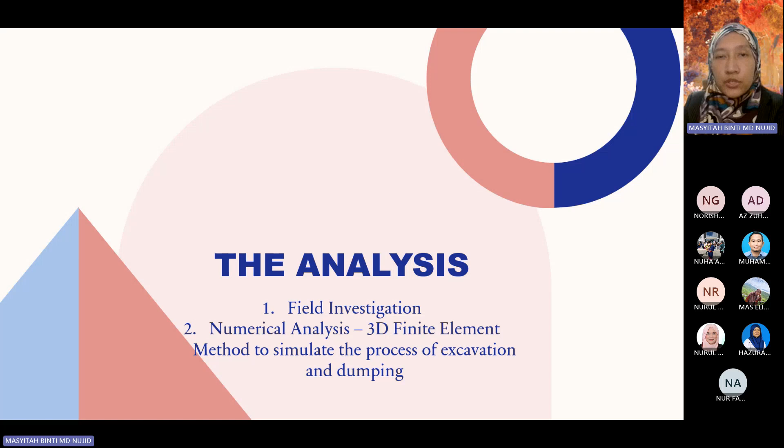We have building number 7, having some sort of pile below the structure. At the north side is the dump site area. Meanwhile, at the south side is the excavation for an underground car park.

So looking back at the south side, they provided soil nailing to retain the soil from movement, but never realized that the problem started where the dump site occurred, where the first stage had an embankment height of around 4 meters, and then at the second stage the total embankment height was 10 meters. So the increase of the embankment over time caused the lateral movement that resulted in the building's collapse.

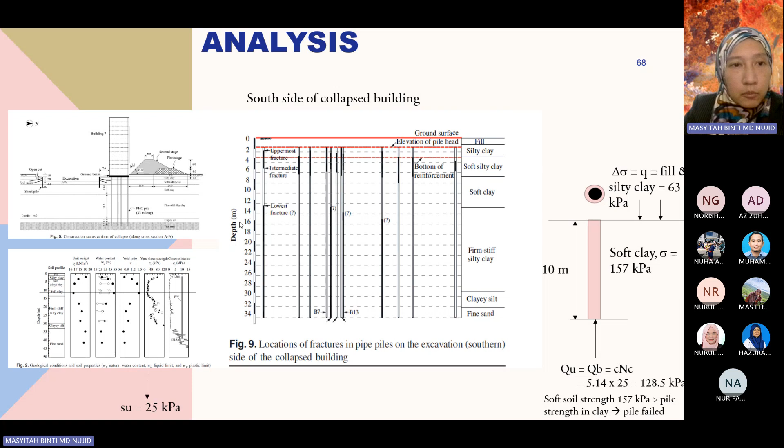To understand what occurred over time, they made cross sections of the building and the area. You can see the 13-story building, the excavation at the south side, and the dumped soil at the north side.

The simulation is three-dimensional, with geometry length, width and height of the soil profile around 160 by 170 by 50 meters. These colors indicate the soil profile at particular depths, meaning the soil has multiple layers with different soil properties, and this high-rise structure is built on soft soil, so you can see the variance of the undrained shear strength. The layout of the problem is given in figure 10b.

What's important in the finite element method is the mesh size of the elements. Every node of the elements gives you stress and strain. Every point of the finite element nodes tells you the different values of stress and strain at that particular point, resulting in the strain and the deformations.

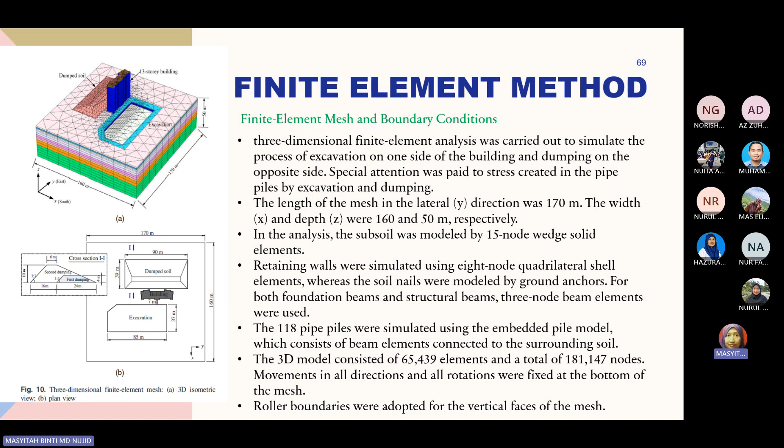So same thing here, dia punya implementation dekat software pun sama, you kena identify lah, you nak allow for deformation, movement at what directions, kemudian you nak kenakan boundary apa, is it roller or is it pin or is it fixed end. So kalau fixed end maknanya takkan ada deformations lah, laterally ke vertically ke apa kan. So kalau you assign for roller, so apa yang kita akan dapat lah. So all this based on the assumptions and based on problem yang kita ada.

So untuk case yang soil parameters ni, so dia dah list out few parameters involved. So from the beginning, from the top sehinggalah ke beberapa kedalaman iaitu 50 meter ni. So you can see that tanah ni is very soft soil. In part of the strength is a very low shear strength. So bila dia low shear strength, maknanya we need to do something lah, sama ada soil improvement ke ataupun soil reinforcement. So at the south side ni, kalau you nampak sebelum dia nak buat underground excavation, so dia dah letak retaining wall as a soil reinforcement menggunakan soil nailing.

So dalam this case, after identifying the depth for every particular soil types, and then they also need to know the unit weight of the soil. So you can see the unit weight of the soil not constant from the first meter at the ground surface to the end, around 50 meter. Same to the undrained shear strength, the effective cohesions, the friction angle. This is EU, the undrained elastic modulus, E' effective elastic modulus, Fs is the ultimate skin friction, Fp is the ultimate end bearing. So these are the parameters for soil.

Maknanya kalau talking about shear strength parameters, selalunya kita nak tahu what is the effective C, what is the undrained shear strength, and also what is the effective internal friction angle. And then the EU, E prime ni dia lebih kepada elastic modulus, because as I said earlier, bila you kenakan loads pada structure, dia akan hasilkan stress. So bila ada stress, dia menghasilkan strain. So the deformations rely on two behaviors, elastic dan juga plastic behavior. So the elastic behavior controlled by these two parameters, yang modulus dan juga Poisson ratio. Meanwhile, for the plastic behavior is controlled by three parameters, iaitu dilatancy angle, effective cohesion dan juga effective friction angle. Assuming that the soil fulfills the Mohr-Coulomb failure criterion.

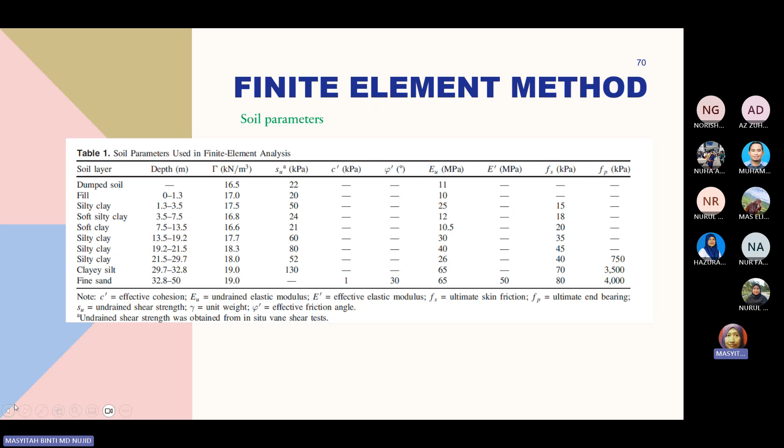And Fs, Fp adalah kalau kita tengok balik theoretical from the pile bearing capacity, Q ultimate sama dengan QB plus dengan QS. So QB is the end bearing capacity, QS is the skin friction capacity. So Fs, Fp tu dia punya coefficients to calculate the ultimate skin friction dan juga ultimate end bearing capacity. Okay, apa pentingnya parameters ni untuk kita masukkan dalam modeling kita lah.

So dalam part of the construction sequence, so these are the assumptions by these researchers, yang mana firstly they're going to assume that the initial stress conditions were generated firstly, and then the construction starting by having foundations, piles installations, and the building. Kemudian the next construction sequence is a dumping of soil to a height of 4 meter on the northern side of the building. And lastly is the constructions of the retaining wall, excavations and dumping of soil to the final height of 10 meter. So ini adalah second stage.

So there is a difference in results kalau the constructions activity ni wrongly set. For example, kalau you tengok at the north side of the building ni, dia punya dump site ni ataupun dump soil ni dia ada dua. Satu yang 4 meter, kemudian satu lagi yang kali kedua dia dump, total height is 10 meter. Let's say lah kalau kata kita buang nombor 3, kita assume construction sequence ni dia terus letak sebagai 10 meter ataupun dia split 10 meter by assigning 5 meter, 5 meter. Itu pun dia boleh bagi difference result to the total deformations of the analysis.

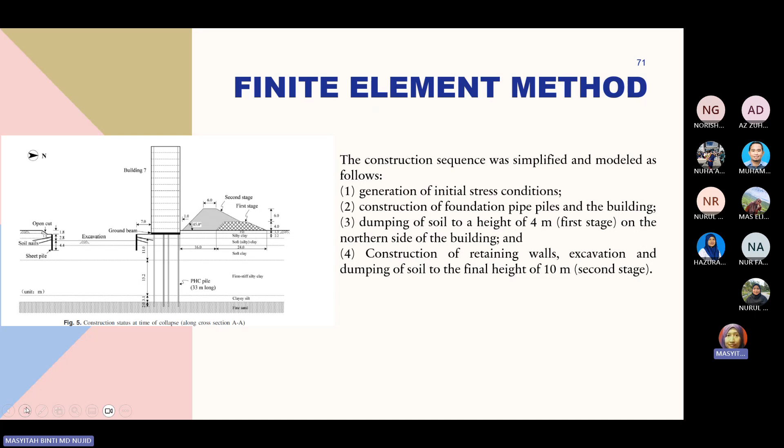It shows that after soil had been dumped to a height of 4 meters on the northern side of the building, the maximum bending moment of the pile reached approximately 58 kilonewton meter. This is the positive moment, and the value is within the pure bending capacity of the pile, suggesting that the pile had likely remained intact at that point in time. This is consistent with the fact that the building was not damaged in the first 6 months after the soil dumping, so this is true.

The maximum positive bending moment in the pile developed approximately 10 meters below the ground surface. So this is what it said then. Below 10 meters depth, there was found to be a negative moment which heads toward the excavation.

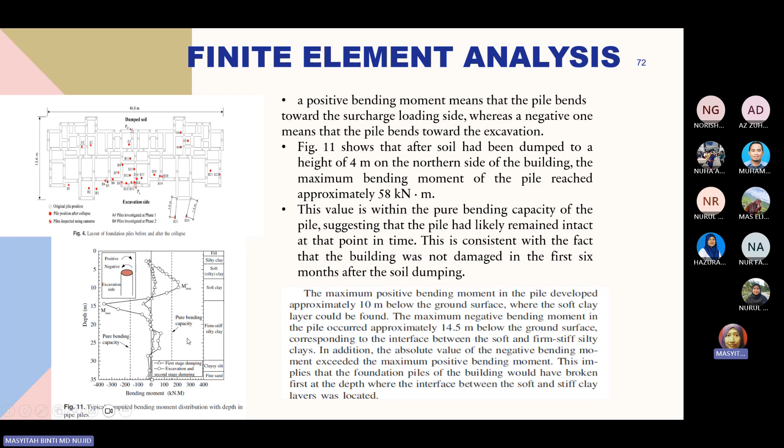So actually it's giving you the idea from the simulations, it seems there was already some signal for structural failure to occur. Then they plot again the pure bending capacity of the pile along the excavation and also the pile near the dump site, one representing the north and the other the south side. It says that the bending capacity of the piles on the excavation side of the building was exceeded, and this pile failed before those on the soil dumping site did.

The embedded pile model, which consists of elastic beam elements, was adopted, and the breakage of the pile could not be simulated in the analysis. This is the reason why the bending moment kept increasing after the bending capacity was exceeded. So this is one of the weaknesses we can find from simulations, because they can give you results until the end. This really needs some expert or engineer very familiar with doing simulations, who knows when to cut off the readings. This is what was stated by the researchers.

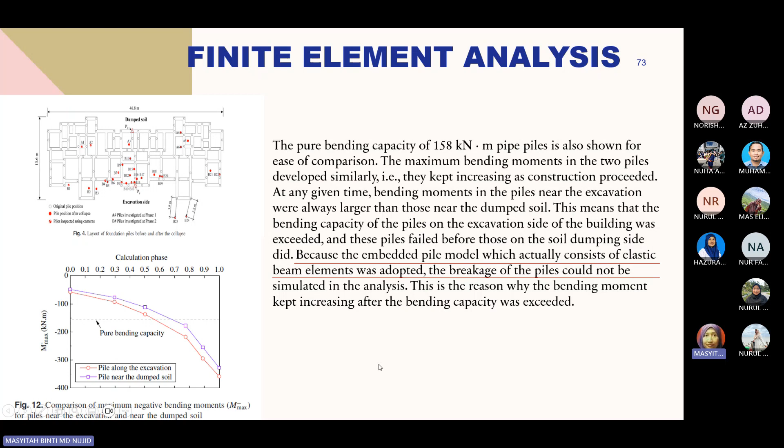So what can we conclude from the post-failure analysis is that at the north side of the collapsed building, uppermost fractures could be seen near the interface between the reinforced and unreinforced section, located approximately 1 to 2 meters below the original level of the pile head. Most of these failure surfaces were flat, implying that these piles failed under tension.

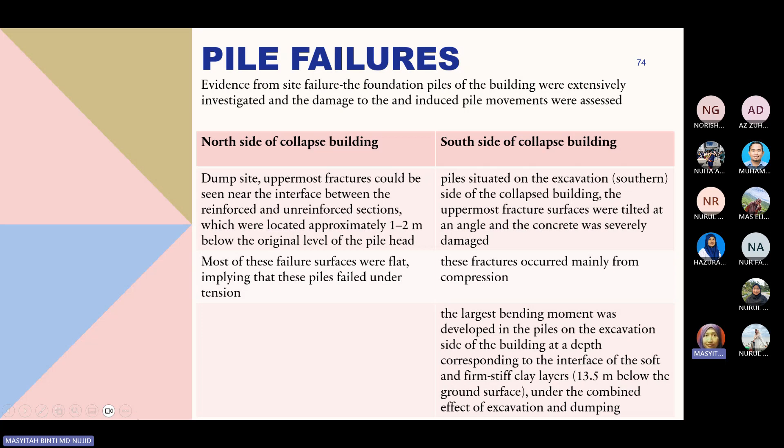Meanwhile, at the south side of the collapsed building, the pile situated under the excavation side, the uppermost fracture surfaces were tilted at an angle and the concrete was severely damaged. These fractures occurred mainly from compression, and the largest bending moment was developed in the piles on the excavation side of the building at a depth corresponding to the interface of the soft and firm stiff clay layers, under the combined effect of excavation and dumping. These conclusions were based on the results found from the simulation analysis. The schematic images show exactly what happened at the site for building number 7, a 13-story building.

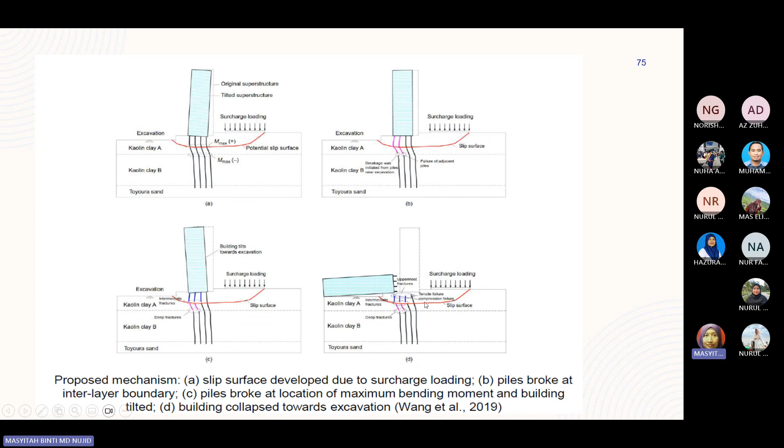Okay, what are the lessons learned? The geotechnical engineers and contractors should be better trained to improve their understanding of the effect of surcharge loading on PHC piles, and the proper construction procedures and site supervision schemes should be explicitly spelled out. Engineers who design foundations in soft soil regions should consider not only the final loading conditions, but also any temporary and transient loading conditions during the construction process.

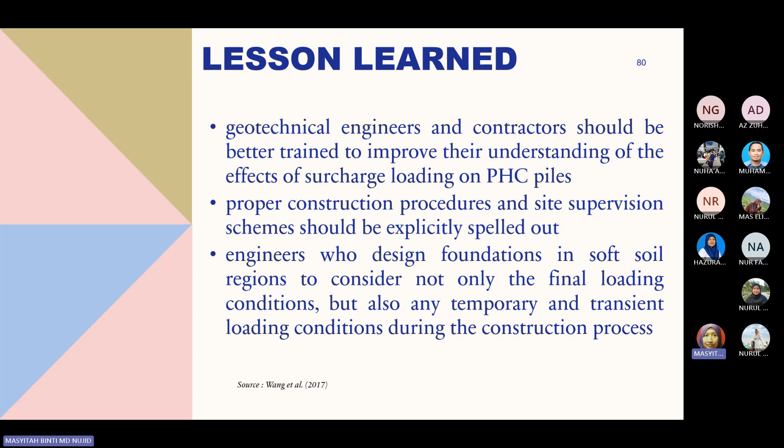So simulations can give extra input or additional factors which we cannot get from analytical calculation alone. We can add on, for example, the other effects or factors to the soil structure problems or interactions.

In summary, it is evident that for this case history, the effect of the temporary embankment filling adjacent to the building may not have been properly taken into account in the foundation design or in the construction.

So the simple but important lesson is that in order to successfully design a foundation in soft soil areas, engineers not only need to consider the final loading conditions, but also any temporary loading such as those that might arise from storage of construction materials and construction generated waste soil.

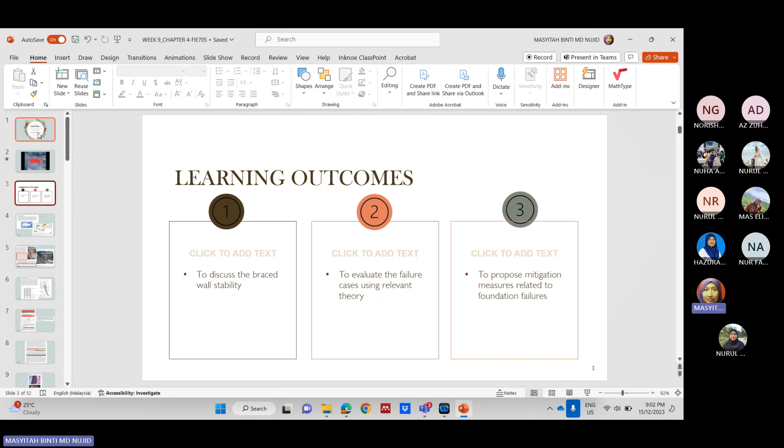Okay, for the learning outcomes, so if you notice here, this is will be on Chapter 4, Braced Excavation Collapse, Nicoll Highway Singapore. Our learning outcomes are to discuss the braced wall stability, to evaluate the failure cases using relevant theory, and to propose mitigation measures related to foundation failures.

So these are the very common framework kalau you ada case study ataupun post-failure analysis. So the first case, we begin with the case descriptions sebelum kita boleh bedah siasat lebih dalam dari segi dia punya analisis dia, kemudian mitigations dia, dan juga apa yang kita boleh ambil pengajaran daripada case study.

So the island city-state of Singapore has one of the best public transport in the world. So yang ni memang dah diakui lah. So the Mass Rapid Transit railway network is the main backbone of this system. The constructions of new 33.6 km long underground Circle MRT line, CCL, started in 2001, costing approximately 6.7 billion. So the CCL will link all the radial lines leading to the city.

So after 3 years lah, maknanya lepas projek tu dah initiated, so dia failed lepas 3 tahun lah. The first stage of this construction, CCL1, was 5.4 km long and was subdivided into 2 contracts, C824 and C825. So saya rasa ada yang di antara kita memang quite familiar with the projects - tender, macam mana dia nak assign, and berapa total cost project.

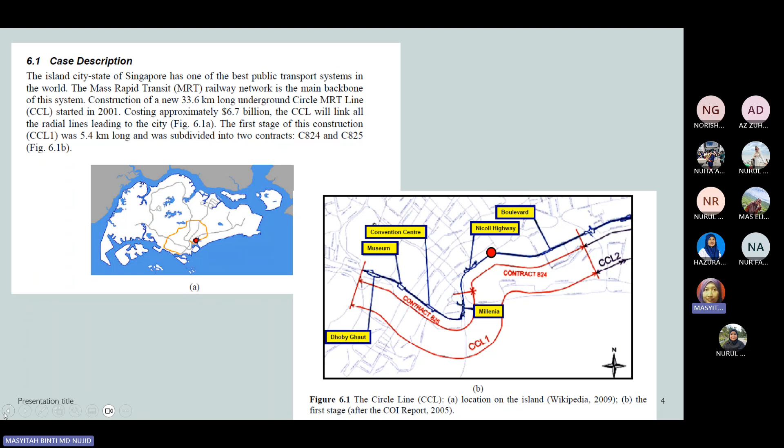So CCL1 tadi yang ni lah, CCL1 dia punya jajaran daripada from the right to the left side here, Boulevard started until to the end of the convention center ataupun Dhoby Ghaut. So bila I say lah, bila this failure occurred, dia memberi impact to the social, dan kesannya is back to nak back ke normal, dia ada benda-benda lah terkesan kan.

So the Singapore government appointed a Committee of Inquiry, COI, to ascertain the causes and circumstances of the accident. From the report in 2005 submitted to the government and the public on the internet, the main source of information for this chapter were found. It concluded that the computer-dominated age, sound like a paradox, which a wrong use of numerical modeling in geotechnical design, together with some structural errors, were the main causes of the Nicoll Highway collapse.

So in the summary, released in 2005, stated these are 2 main causes to the Nicoll Highway collapse.

But as I said again, some numerical modeling and simulations is very good and helpful in your analysis, kalau kata the engineer and the persons are very familiar with the software, then having a good knowledge about the problems ataupun the fundamental of the geotechnical engineering or whatever, sama ada geotechnical ke structure ke apa benda. So with the experience blend with the knowledge, insyaAllah dia akan produce a good results lah. But again, they need the second checker untuk lihat semula lah the output of the simulation.

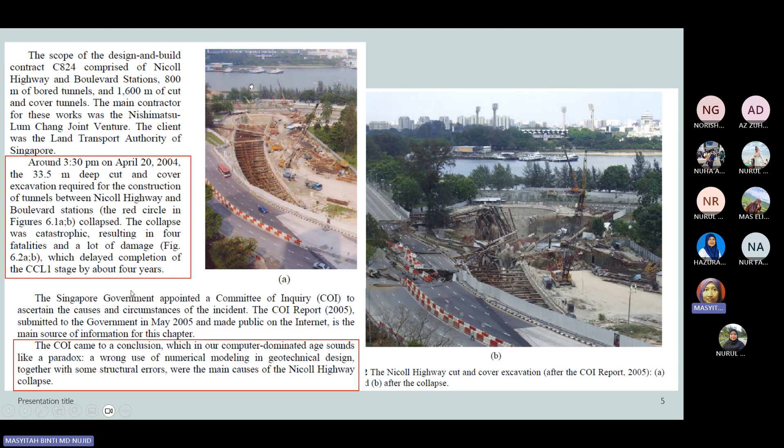That's why when you are doing the simulations or numerical analysis, the next thing yang you kena buat adalah verification result ataupun validation result. So the main reason why we do the verification and validation to check our results is by comparing to the analytical solutions or any kind of the software. So itu cara untuk pastikan numerical yang terhasil ataupun result yang terhasil daripada numerical solutions tu adalah benda yang betul. So now the summary 2 reasons sahajalah, tetapi kita try to look at in details.

So bila cerita pasal excavations activity, meaning that the thing is not easy, dan selalunya excavation depth tu not 3 meter. They can go beyond 3 meter. For example, here 33.5 meter depth. So in this thing, bila kita nak retain soil from movement, yang kita perlukan adalah wall. So dalam this case, it can be any kind of the retaining wall. For here is a diaphragm wall. Dalam thickness dia 0.8 dengan dia punya kelebaran antara satu wall kepada wall yang lain dalam 17 hingga 20 meter jarak dia lah. Okay.

Dia menggunakan design and construction method iaitu cut and cover tunnels for the contract C824 using the bottom up method. So the diaphragm wall used at this section at the cut and cover tunnels was 0.8 meter thick and penetrated 1 to 3 into stiffer strata at the depth of about 40 to 45 meter. So ikutkan kalau daripada statement ni kita nampak lah sebenarnya diaphragm wall tu dia dah mid to the hard stratum around 40 to 45 meter lah. Kalau ikut excavation depth yang diperlukan around 33.5 saja. So basically we can assume that impossible nak berlaku any kind of the failure lah, sebab kita dah nampak it is well stand at the hard stratum.

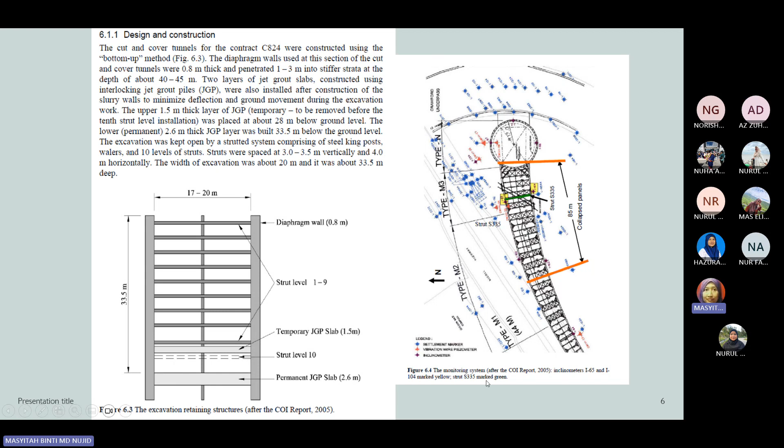So during the constructions, there were some installations of the instruments such as settlement marker and also vibrating wire piezometer, and lastly is the inclinometer. So the monitoring or instrumentation tools are helping to provide in situ data, for example, the height of the water level, and then the soil movement. So actually it can be predicted by looking at this data collected at the real time. So kalau ikutkan details lah kat sini, instrumentation layout dah banyak, settlement marker semua dah provide, piezometer pun dah ada, so nak baca ukur tinggi aras air, inclinometer pun sama. So as I said, dia boleh berlaku jugalah, unexpected.

So an extensive monitoring system was installed, included more than 2,000 monitoring instruments, settlement markers, inclinometers to measure soil and wall displacement, vibrating wire piezometers to measure pore water pressure, strain gauge, and load cells to measure the strut loads. So the readings from the inclinometer I-65 and I-104 and strain gauge and load cells in the strut S335 are crucial for understanding the cause of the excavations collapse. So if you look at here, the next thing when they did the back analysis or post failures, these instruments are given the important data to analyze for the causes or reasons behind the failure.

So the COI report states warning of the approaching collapse were present from an early stage, but these were not taken seriously. Indeed, as early as August, it became clear that something was wrong with the design, meaning that they already detected in August 2003. First, in the launch shaft for the tunnel boring machines across the river east from the collapse area, measured wall deflection exceeded 500 millimeter, while the calculated design level was only 190 millimeter. So this is the early sign actually something can happen.

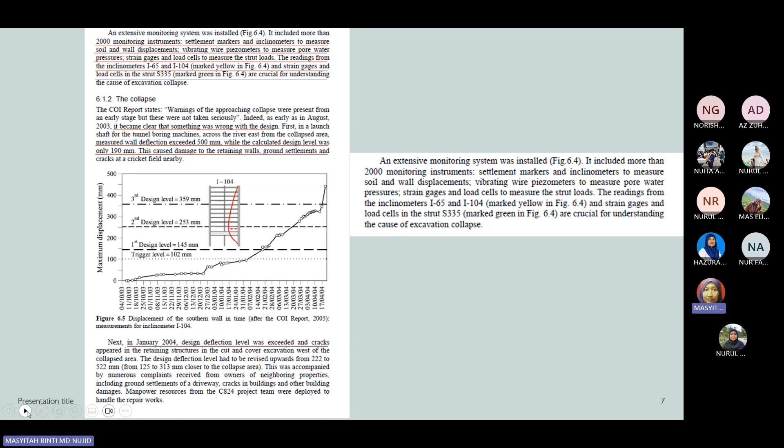So the deflections were accompanied by buckling of waler stiffener plates, which were replaced by C channels starting from the 7th level. On the basis of back analysis, it was decided to update the design level to 253 millimeter and increase the preloading of the struts from 50 to 70%. So this is another thing that they found. They should have adjusted, or they needed to redesign and reanalyze, because they already got the data from in situ monitoring. So supposedly they needed to change the previous design and analysis to the current design and analysis based on the instrumentation monitoring data.

Unfortunately, they did not. In the end of March 2004, the new design level was exceeded again. Another back analysis produced another revision of the design level up to 359 millimeter. Nevertheless, when the last measurement was taken on the day of collapse, it was exceeded by as much as 22%.

So actually, from this statement, the case study is quite difficult to write up to produce good writing, because if you have a complete set of the data, you can produce a good case study report. If you cannot gather all the data, for example, you do not provide any field instrumentation monitoring, and you do not keep any design and analysis prior to the construction, in between the construction activity, and the last design and analysis, if you do not keep all this data from the beginning to the last day of the collapse, you cannot produce a good report.

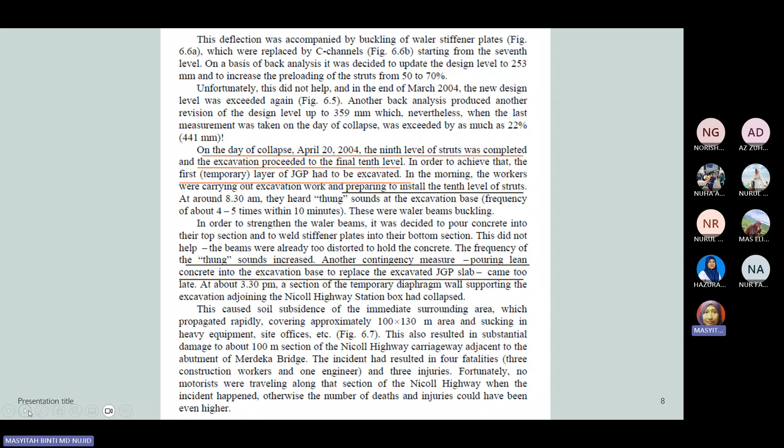As I said earlier, the area was reclaimed 20-50 years ago, and the water level is 2 meters below the ground surface. The estuarine organic deposits, upper and lower marine clays, and more fluvial and estuarine deposits. These soft clays are underlain by stiffer sands, silts, and clays of the old alluvium. The best estimate of the undrained strength is given in figure 6.8. So here, this is the undrained strength test. This is important if you want to do back analysis or calculate the strength of the soil as well as soil structure interaction problems.

And you can see from here, the upper and lower marine clays and more fluvial and estuarine deposits.

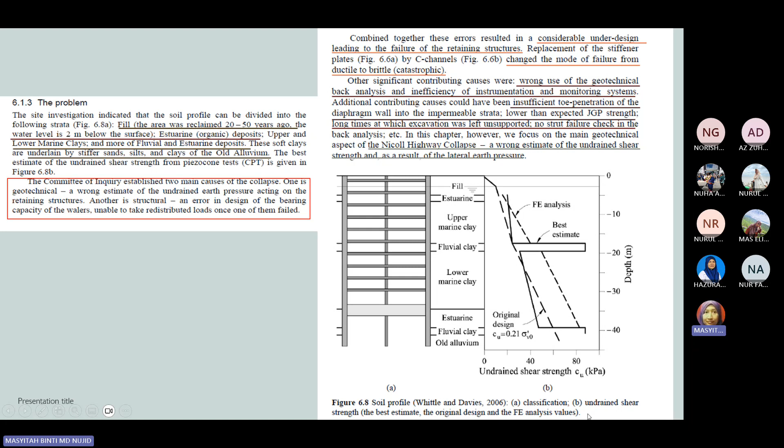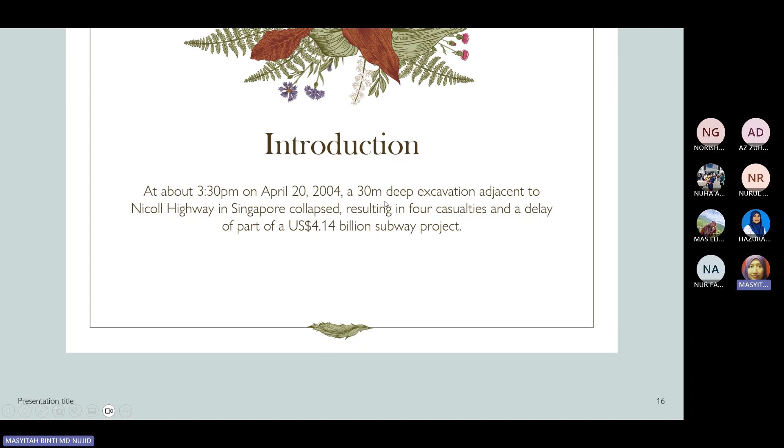So again, just to recap, these are the important informations: 30 meter deep excavation, then the history of the failure, the reasons the collapse occurred. So as I explained just now, there are two, namely deficient monitoring and also error during the design. How it happened has also been informed, which is the retaining wall could not handle the stress of holding up the tunnel, forcing it to give way. So this occurred near the Nicoll Highway MRT station under construction.

So not to forget, when we're talking about excavations or retaining wall applications in geotechnical study, it is about the lateral earth pressure or lateral earth stress. So once we have the overburden pressure, not to forget there is another stress affecting the structure, which is lateral earth pressure. So the lateral earth pressure comes horizontally. When the soil is subjected to excavation, you release the stress, and you can see some soil will move towards the wall or away from the wall. So if the wall is in the stated condition, that is the at-rest condition. So the wall is safe.

However, if you have some additional loads, for example, surcharge on the ground surface, and then the other effect of the water table, this can result in lateral earth pressure in the active state, which is the wall moving away from the soil. Vice versa, if the wall moves toward the soil, that is the soil in the passive state. So you can see there's another equation related to the overburden pressure and also the lateral earth pressure. So this is why I try to explain that the stress we found here is related to the lateral earth pressure or lateral stress.

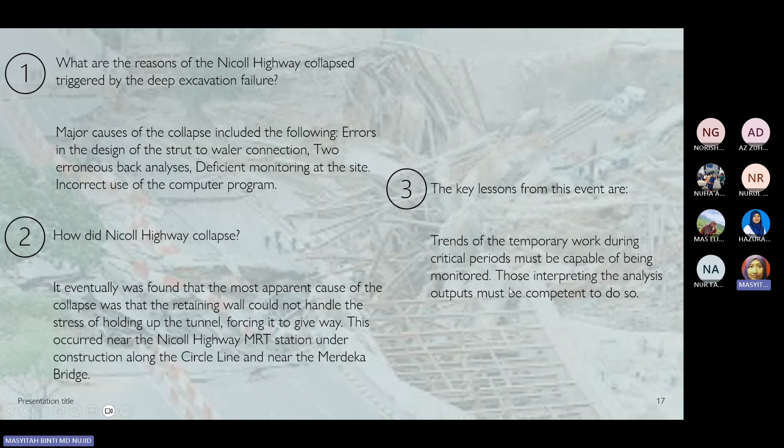The key lessons from here: the trends of the temporary works during critical periods must be capable of being monitored, and those interpreting the analysis output must be competent to do so. So these are the informations about the soil profile at the area. And the same reasons: a wrong estimate of undrained earth pressure acting on the retaining structure, and error in design of the bearing capacity of the walers. So reason number 2 we won't look at; we try to look at the main problem from the geotechnical aspect.

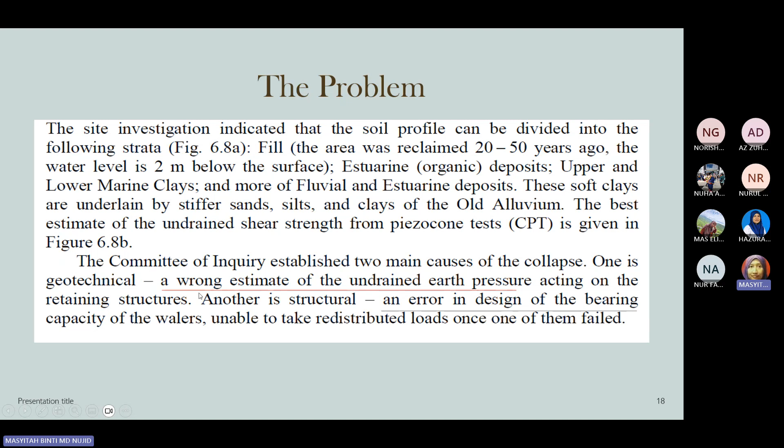Okay, this is the same image. Okay, these are a few factors, among them back analysis, inefficiency of instrumentation, and then insufficient toe penetration of the diaphragm. Meaning the diaphragm wall actually did not even enter the hard stratum. That is among what they assume. And then no strut failure check in the back analysis, meaning the design did not include the strut

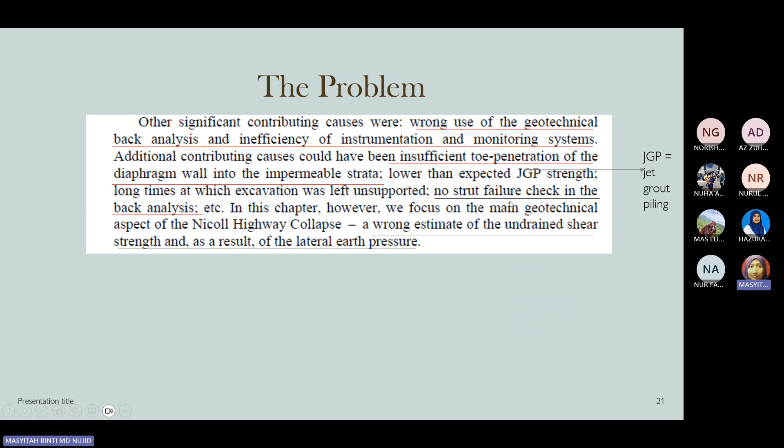characteristics or strut properties. Okay, the major causes of the collapse include the following: errors in the design of the strut-to-waler connections, two erroneous back analyses, deficient monitoring at the site, incorrect use of the computer programs. The contributory causes were listed as follows: inconsistency between design criteria and codes, insufficient embedment for hydraulic cutoffs, special geometry not taken into account, cable crossing disrupted diaphragm walls and JGP slab, inadequate appreciation of complex ground conditions.

Of course, it is very complex because kalau you tengok, walaupun kita nampak on part of the soil from the top to the bottom, nampak macam jenis soil formation yang sama, tapi the process of the reclamation occur few years after. So the current stress and the previous stress dia tak sama. So stress macam clay ni dia boleh ada normally consolidated clay, dia boleh ada over consolidated clay, kemudian dia akan ada pre-consolidation pressure. So these are other factors when you want to analyze the soil type such as clay.

So kalau you analyze foundations ataupun excavations in sand, they will also result in different values of the lateral stress pressure ataupun lateral earth pressure. So when you want to analyze, firstly you need to know what geotechnical application you want to do, and then what soil type it will be laid on, and then you identify the strength parameters and also what are the soil models. Kalau benda-benda ni dah complete, so you can proceed with the analysis.

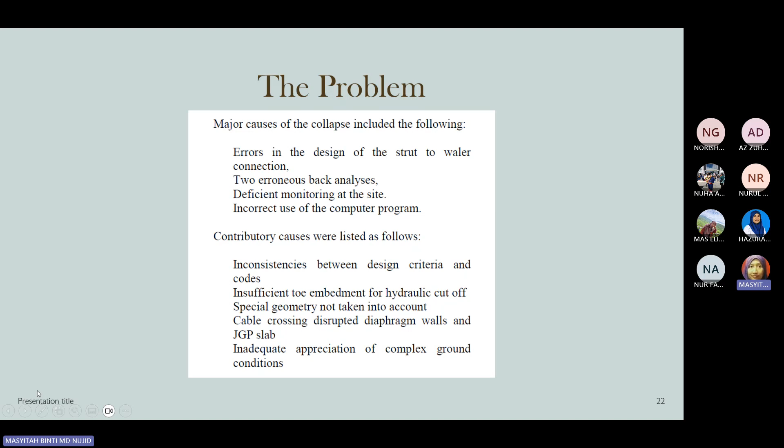So this is the theoretical part. Basically, when we want to analyze, we need to ensure, is our structure short-term stability or long-term stability? Just to show you the differences, talking about the strength parameters and the strength value. If you have the long-term stability, it's a drained shear strength. It is a period of time that you allow the water to dissipate from the soil structure. So you can analyze the long-term stability using the drained shear strength parameters by effective stress analysis, where there is no excess pore water pressure, resulting in the effective c and also effective phi.

For the short-term stability, it is the undrained shear strength. It occurs very shortly. So the analysis uses the total stress analysis with excess pore water pressure, and the parameter or symbol for the shear strength is cu, or undrained cohesion.

So we want to analyze from the retaining wall theoretical background. Imagine that at the left side of this image, we have a pressure diagram. The triangle shape is showing you the pressure diagram. From the top is the ground surface, and to the bottom is depth Z. Ideally, when we calculate the overburden pressure or the effective vertical stress at the ground surface, for example, Z sama dengan kosong. So contoh unit weight of soil sama dengan 10 kilonewton per cubic meter. Actually, I try to explain how the triangle pressure diagram is produced.

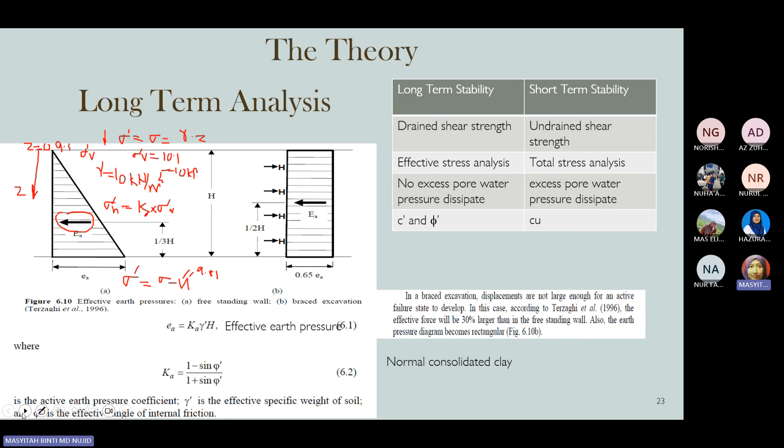For the undrained shear strength, to estimate it you can conduct experimental testing using unconsolidated undrained tests, or vane tests, or cone penetration tests in normally consolidated clay. Due to the development of positive excess pore water pressure during undrained shearing, the effective stresses decrease as seen in figure 6.9b. So this experimentally determined undrained CU is significantly smaller than the clay strength at the same initial effective stress in drained shearing.

So an empirical rule of thumb gives the following approximate relationship for the undrained shear strength of normally consolidated clay, as shown here. The undrained cohesion, undrained shear strength, of normally consolidated clay can be calculated using formula 6.5. K equals 0.21 to 0.25, depending on the value or clay type. The effective V0 is the in situ geostatic vertical effective stress.

The lowest value of K, 0.21, is valid for soft marine clay, which is the case in Singapore, and the shear strength values for original design in figure 6.8b are apparently based on CU equal to 0.21 times effective V0. Using the effective stress approach, different constitutive models predict the relationship in 6.5 with different degrees of accuracy.

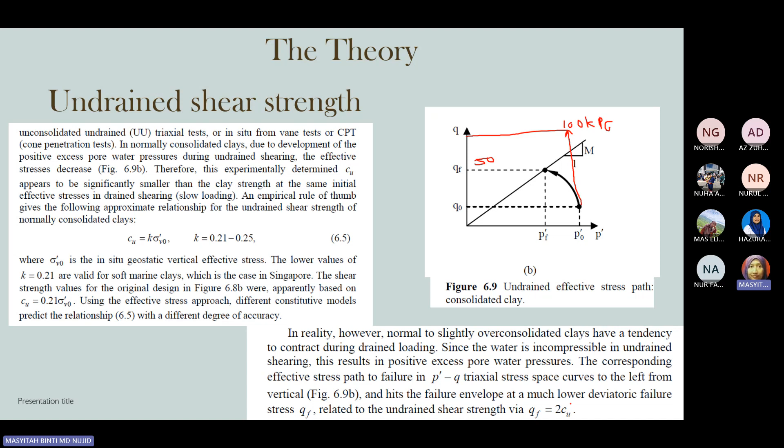That's coming to the error in design. So normal to slightly over-consolidated clay has a tendency to contract during drained loading. This water is incompressible in undrained shearing, so this results in positive excess pore water pressure. The corresponding effective stress path to failure in P-Q stress space curves to the left from vertical and hits the failure envelope at much lower deviator failure stress, related to undrained shear strength via QF equals 2Cu. QF is the compressive strength. So if you want to get undrained cohesion, QF needs to be divided by 2.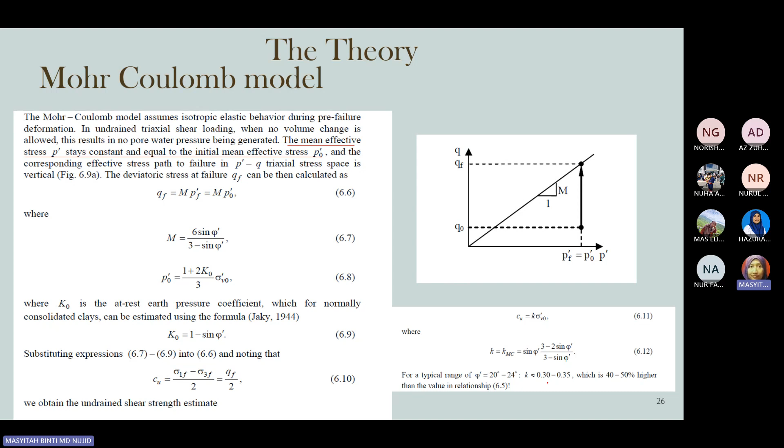So it's assumed that QF equals M times P naught, where M is the critical state line slope gradient. M can be calculated from equation 6.7, and the mean stress P naught can be calculated from equation 6.8. K naught is the at-rest earth pressure coefficient, which for normally consolidated clay is calculated from equation 6.9. Substituting equations 6.7 and 6.9 into 6.6, and noting that the undrained cohesion equals QF over 2, since Cu equals K times sigma effective V naught, finally we can get K equals sin phi effective times 3 minus 2 sin phi, over 3 minus sin phi. So this is a typical range to get phi effective, K effective, and also the other relationship for equation 6.5.

I think that is enough. Modified Cam-Clay is a bit more difficult compared to Mohr-Coulomb. So I think it's better I stop with Mohr-Coulomb. You get familiar first with Mohr-Coulomb before we go to the extensive advanced model for soil, which is the Modified Cam-Clay model. You have to understand Mohr-Coulomb first before you can understand the Modified Cam-Clay model.

Is there any questions before we end our class tonight?

Oh, so firstly, if you have an SI report and you conduct SPT tests, better you use that data. We definitely won't get the same soil profile from top to the hard stratum. So there are empirical correlations or relationships to give the strength based on the SPT N number. Or if you want to analyze for bearing capacity, find the right equations to get the bearing capacity based on the site data.

Let's say you don't have SI data or site data, but you want to do the analysis. So you need to get typical data commonly used by other researchers. For example, if you want to study in Malaysia or certain particular regions, you need to know. If you're doing a project in Perlis, you can't take data from Penang because the geological formation is totally different. So then you have to get the nearest site data that can provide the same data.

Then if there's still none available, you can use typical data from any articles, for example in Malaysia, but you have to be careful with the range value and look at what soil type it is. Once you can identify the soil type, you'll see that if you have different soil strata, that can produce different soil strength or undrained cohesions or other data. But if you want to analyze at a particular depth only, we don't need to take the variations of the undrained cohesion - you can just use the average coefficient, that's enough.